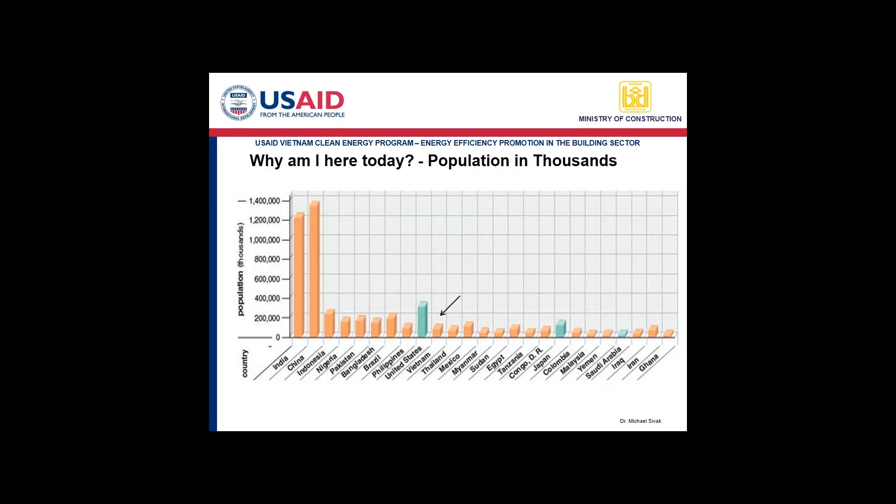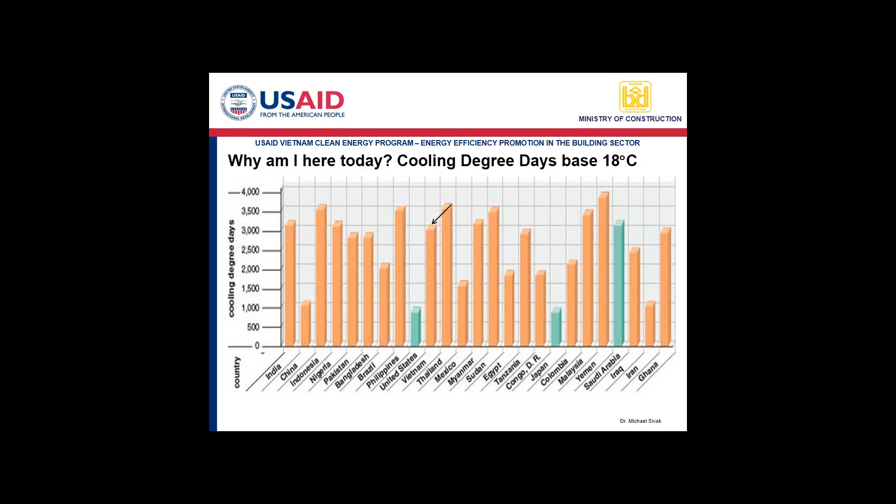So if you take the amount of energy used in air conditioning buildings in the United States, you take the population, and you take how hot it is, you can develop a metric called person cooling base United States.

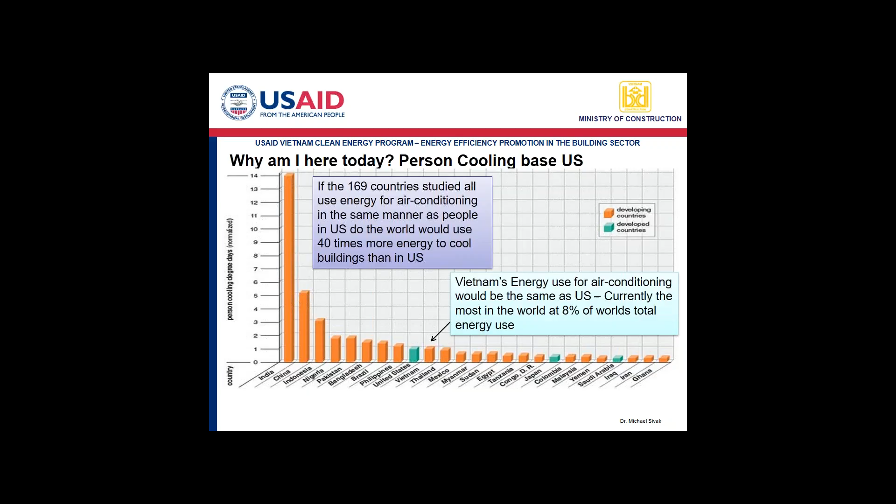I'm going to try to describe a method for using life cycle costs to decide the best systems to use in buildings.

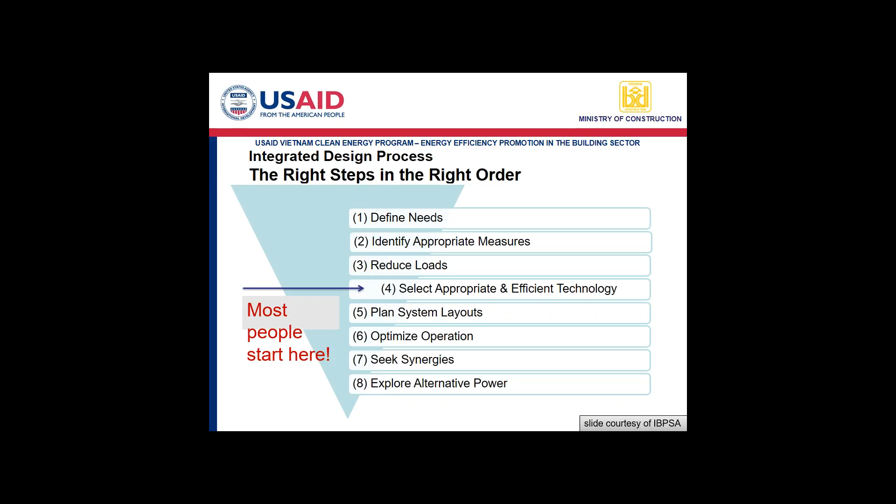What we should do is run a model at the first of the design and divide up the energy used in the building between the different people working on the design - the lighting designers, the architects, the engineers.

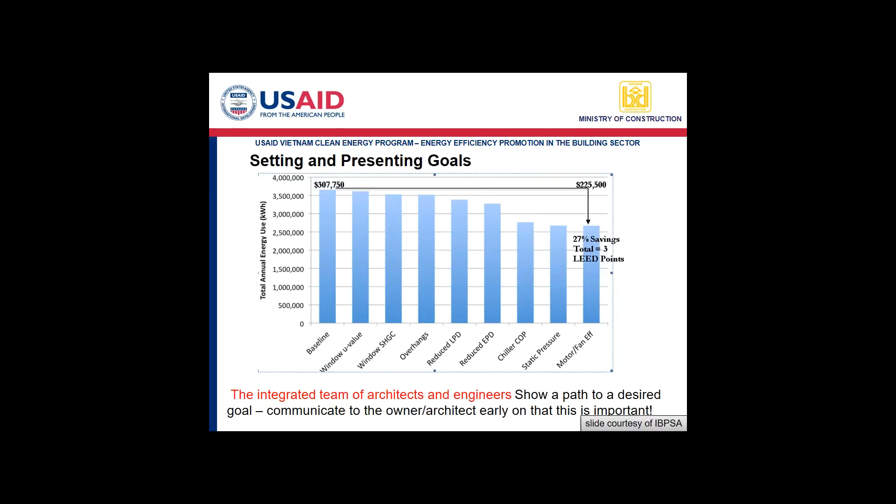One good way to do this is to have a goal setting charrette, which is a meeting where everyone involved in the project gets together and decides how best to solve the problems of energy use in the buildings.

Và sau đấy là cả nhóm họ tập hợp lại để thực hiện đặt ra cái mục tiêu. And everyone - the owner of the building, all the designers - agree on what type of goal we're going to set.

Whether normally it's a goal of kilowatt hours per square meter per year. Cái mục tiêu thông thường nhất sẽ là cái số kW giờ trên mét vuông một năm, cái mức tiêu thụ năng lượng tính theo diện tích.

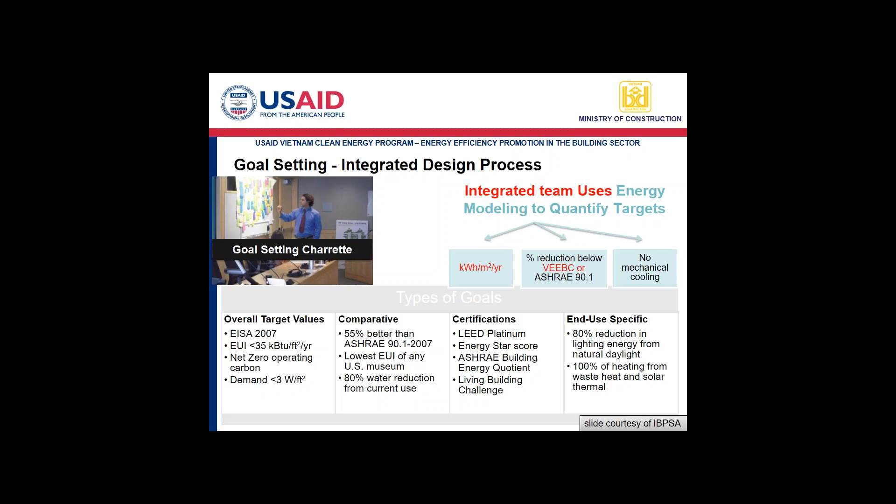And the technique I want to introduce is called technical potential of a measure. Và cái kỹ thuật, cái phương pháp thực hiện là cái kiểm tra cái tiềm năng kỹ thuật.

So it is the minimum level of energy consumption possible for a building given today's technology, excluding renewables. Thì đấy được gọi là định nghĩa, đây là cái mức năng lượng tiêu thụ thấp nhất có thể cho một công trình với những cái công nghệ mới nhất hiện nay, ngoại trừ cái năng lượng tái tạo.

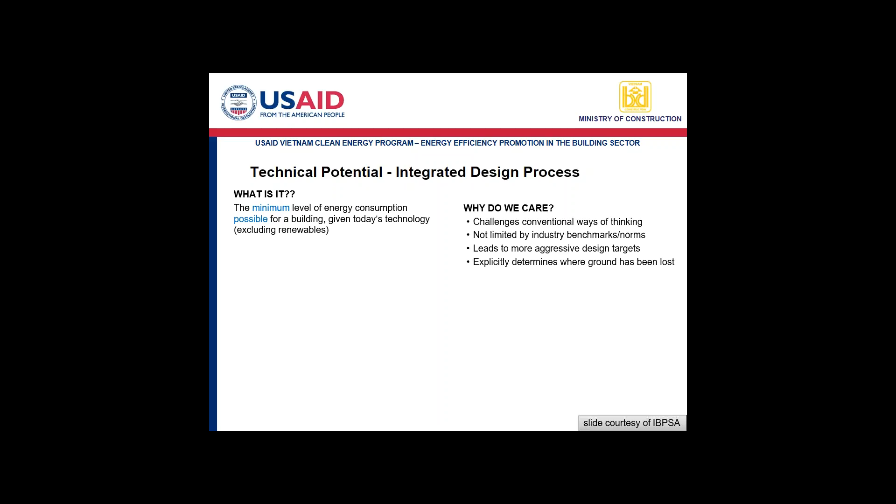It allows us to look at the building differently and to take the limits off, usually imposed by industry benchmarks and other preconceived notions. Và tại sao chúng ta phải thực hiện những cái này là do khi thay đổi thì chúng ta sẽ phải rất chú ý đến những cái yếu tố quy định tiêu chuẩn.

So this is a pump, for instance. You start with the current design of the pump, how much power it uses. And then you say, well, what if I used better control valves? What if I used larger pipe and lowered the pipe friction? What if I used long radius fittings and lowered the friction? What if I reduced the static head, if there is any static head on the pump? If I did all the things you could possibly do, you would get to a theoretical minimum energy use for the pump.

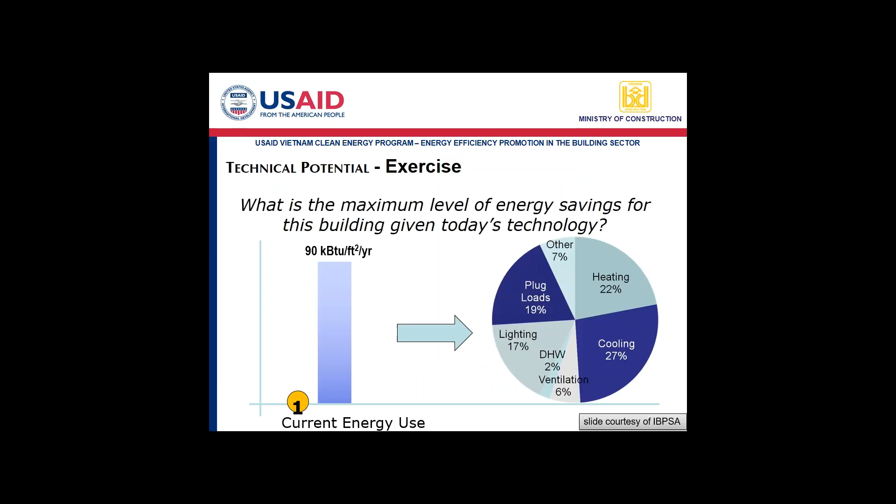Then you come back and say, I got 65% savings by doing everything possible.

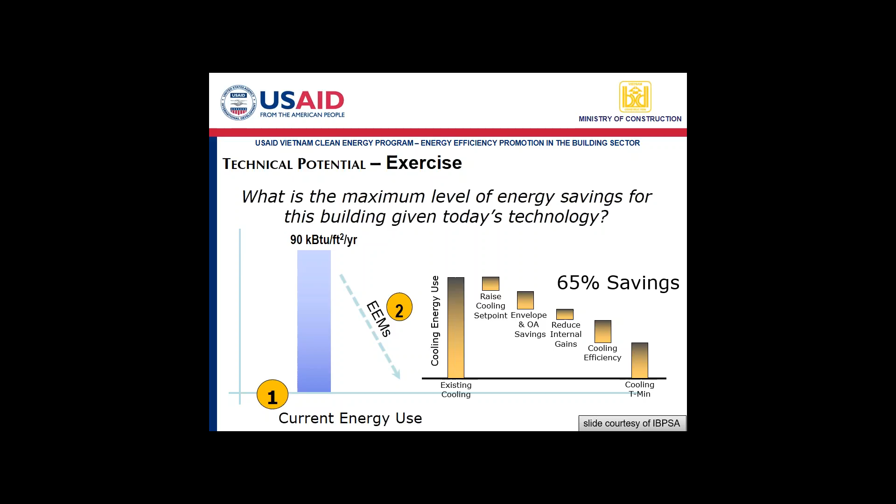But I can't really do everything that's possible. There are constraints, and the constraints you wait till the end to add them back in.

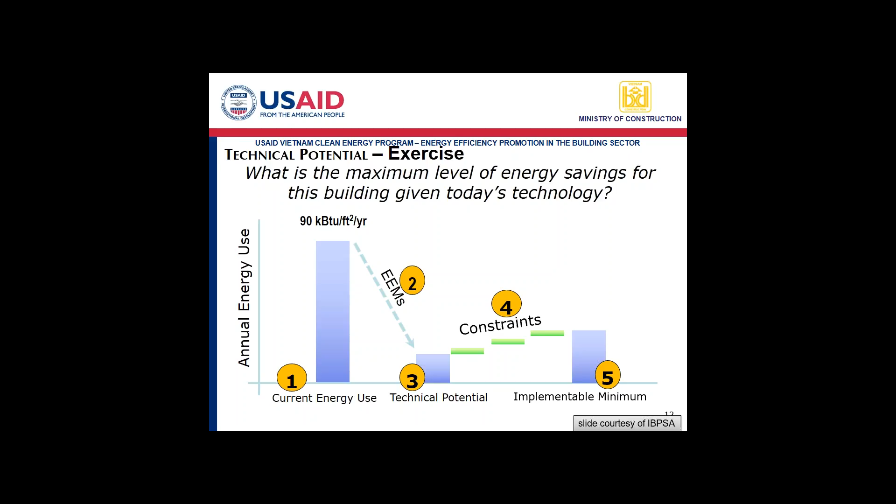So you have a potential of saving 67%, but 29% of that is not cost effective, and so you end up only saving, going from 30,000 BTUs per square foot up to 57.

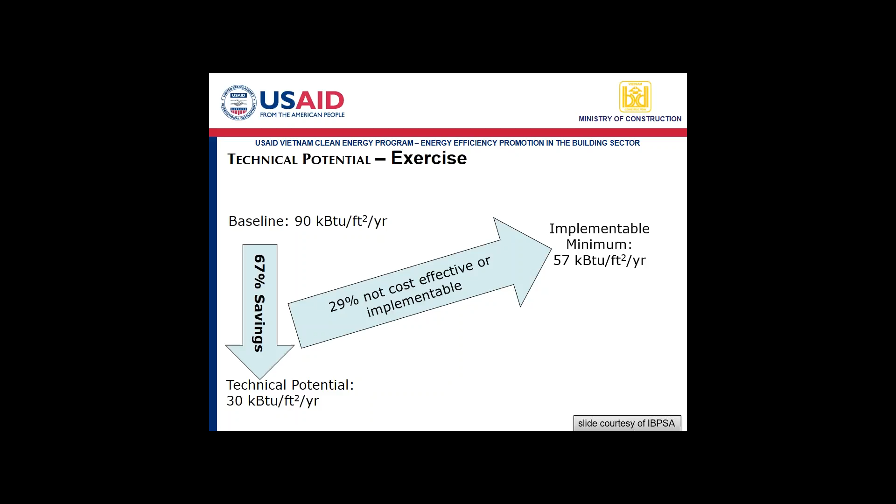Again, if we look at all of those things we can do to the building, we reduce those energy savings, but we still get a 38% reduction from what our technical minimum was.

So it's a method to not think about what it costs or whether you can do it until you get all the possibilities down, and then you start eliminating them instead of throwing them out at first.

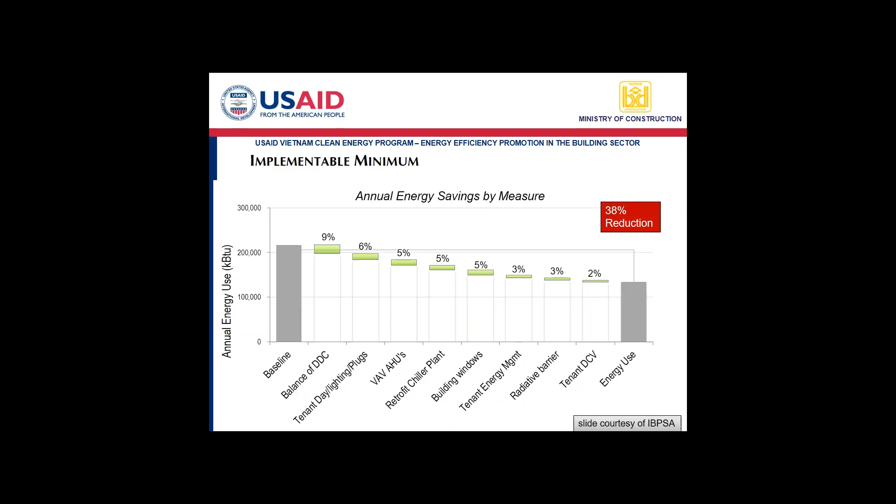Once you identify all your measures, you have to do a very good job of combining them into bundles and testing the influence they have on each other.

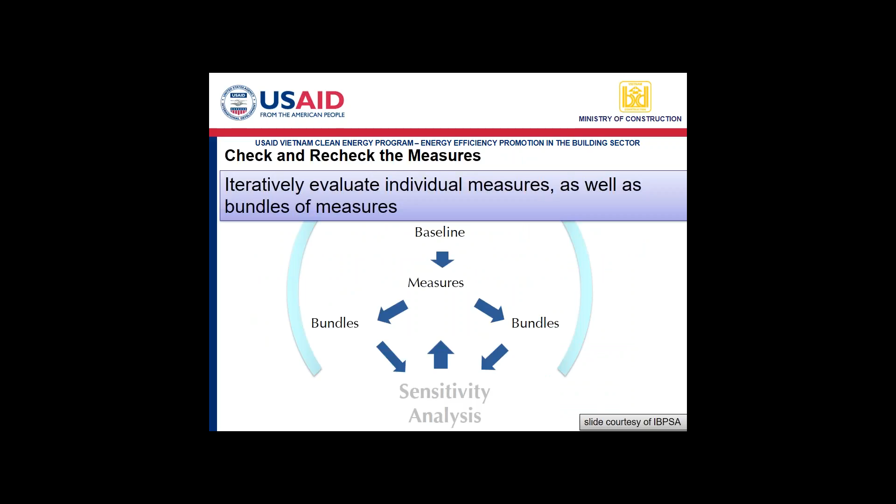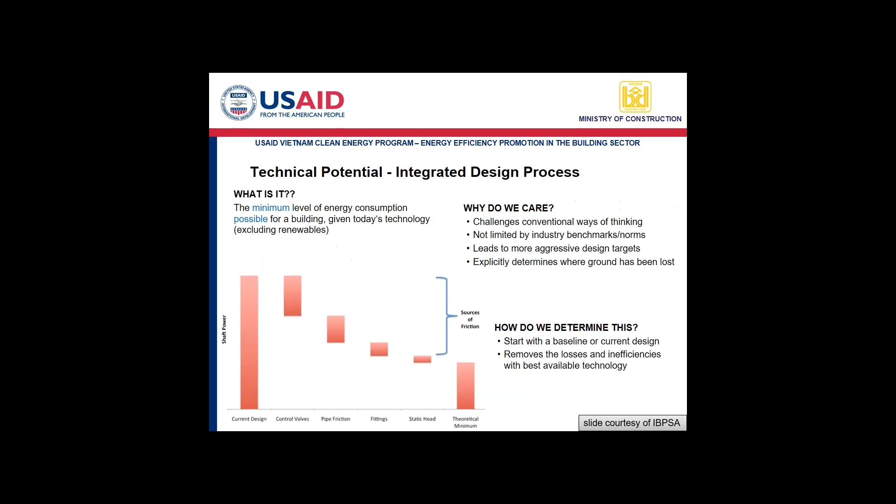So Joe is asking about the architect's influence on HVAC. The architect is responsible for the envelope. He has a large impact on the lighting. He has a large impact on the infiltration. So whatever the architect does to a building lasts for 35 years or longer, and it costs no more energy - it's first cost only. So the best thing you can do is spend a little extra money on the architecture, and mainly make him take all the windows out of the building and just put brick walls. Anyway, he is a big influence on the way we use energy.

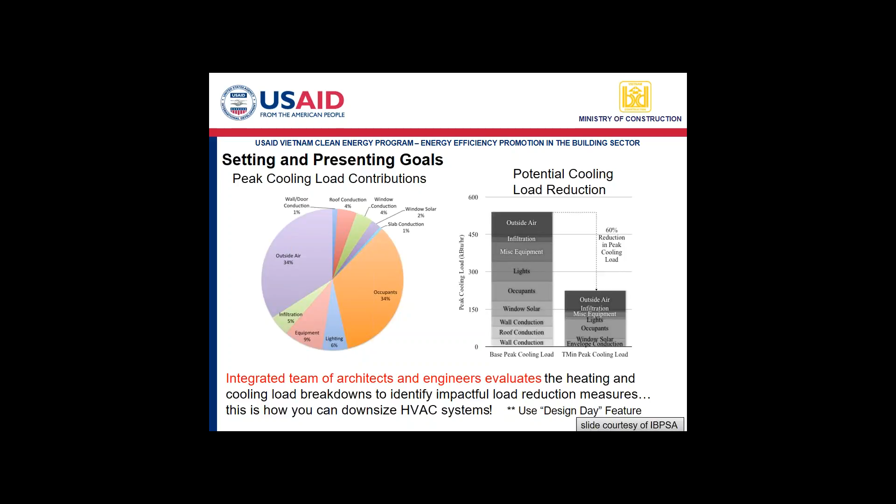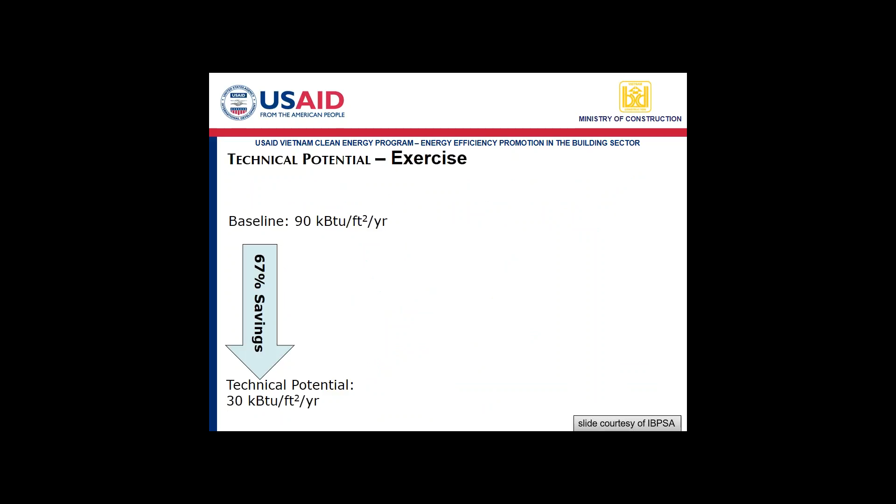Tức là ý của ông Joe muốn nhắc với ông Mike ở đây là đánh giá rất cao vai trò của kiến trúc sư ngay từ thiết kế ban đầu, phải giảm tải cho toàn bộ công trình, vì bất kể phương án thiết kế nào của chủ công trình thì ngay từ đầu nó sẽ ảnh hưởng đến công trình đó trong vòng 30 năm về sau. Do vậy thậm chí trước khi chúng ta nghiên cứu về vấn đề điều hòa không khí thì kiến trúc sư phải rất cẩn trọng trong vấn đề thiết kế vỏ bao che cũng như thẩm thấu của tòa nhà.

Most of my life, the lighting and the HVAC were both used about the same amount of energy in a building.

Khi mà ở những thời điểm đầu tiên thì tiêu thụ năng lượng cho ánh sáng và điều hòa không khí là khá tương đương nhau.

And now the lighting has gotten so good that the HVAC in general is the biggest energy user. Và bây giờ phần chiếu sáng đã giảm được rất tốt và phần tiêu thụ năng lượng lớn nhất thì thuộc về điều hòa.

Did you do these words yet? Okay.

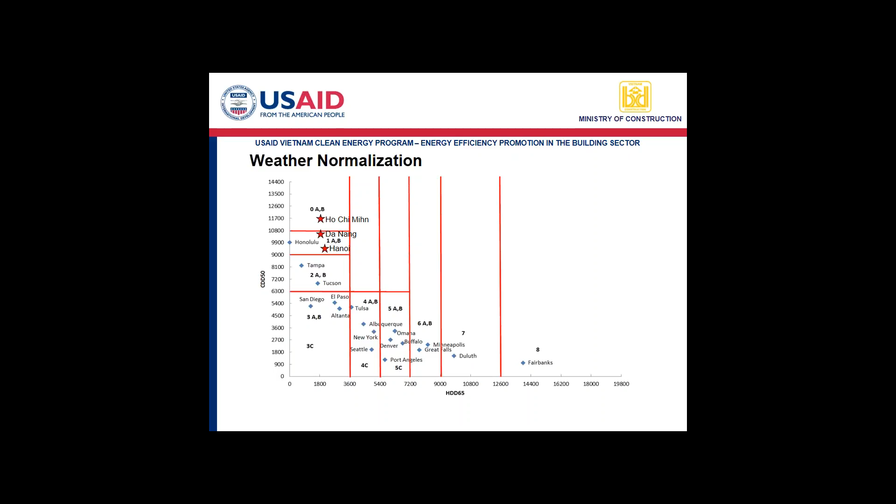So if we take the office building, the 4-story office building, and we run a model in each one of the cities that represent a different climate zone, including 5 cities in Vietnam, then we look at the cubic meters per hour of air per meter squared, and the cubic meters per hour per kW of cooling, and use those metrics to divide out the different cities.

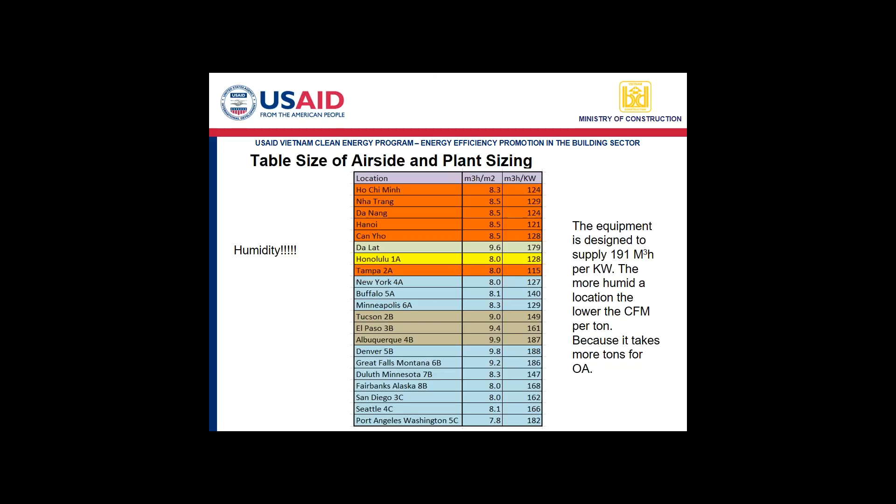You can see the hotter is in red. I'm running them from climate zones from the hottest to the coolest as we go down.

The amount of air we put in per square foot has more to do with altitude than anything else, because it takes more air to cool the higher you are above sea level. The density of air is less the higher you are on a mountain, so the fan has to push more air. You have to have more cubic... more air delivered to do the same amount of cooling.

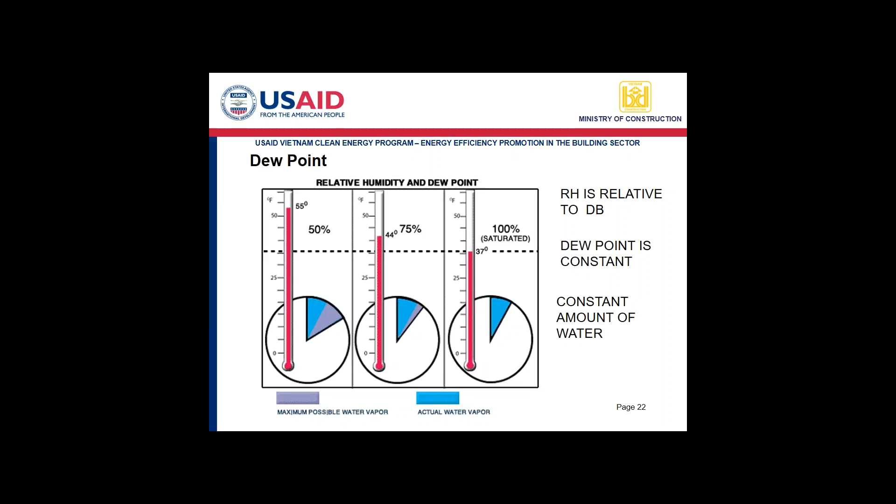So let's look at some HVAC systems. The first one we'll look at is for this office building, a 4-story office building, typical but well designed: a DX single zone split system.

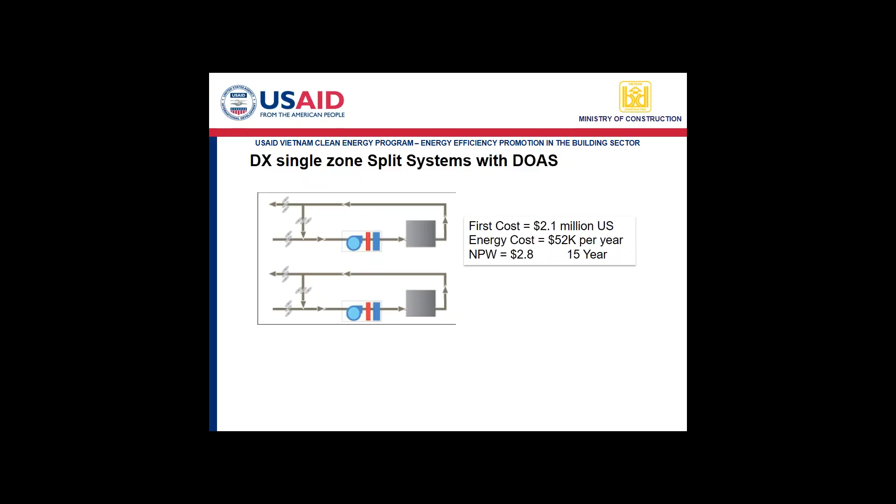So as we went through, the advantages of a split system are low first cost. It's easily maintained because it's a very simple system.

It can keep replacement parts, units, so you can just have some replacement units that you could put in quickly and anybody can work on it. And it minimizes the amount of square foot you use for HVAC systems in your building.

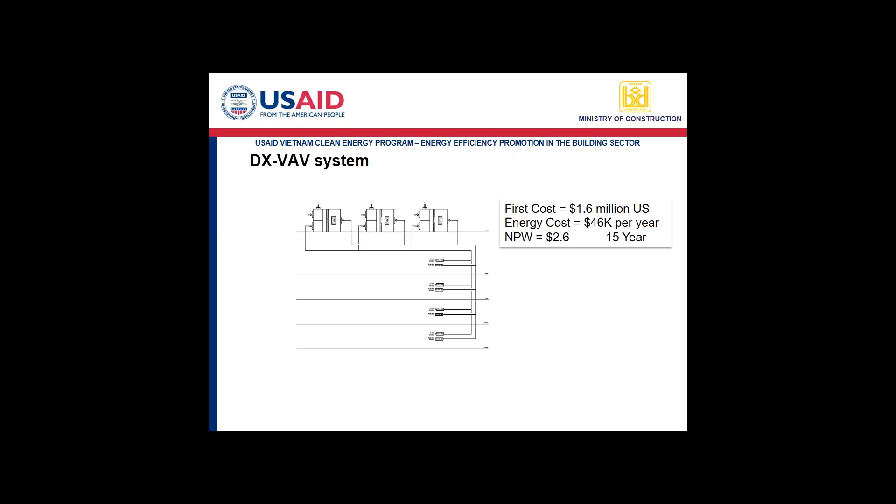So this has the lowest absolute first cost. It's the lowest life cycle cost with the demand-controlled ventilation. I'll explain that to you in a minute. And it's got the lowest maintenance cost.

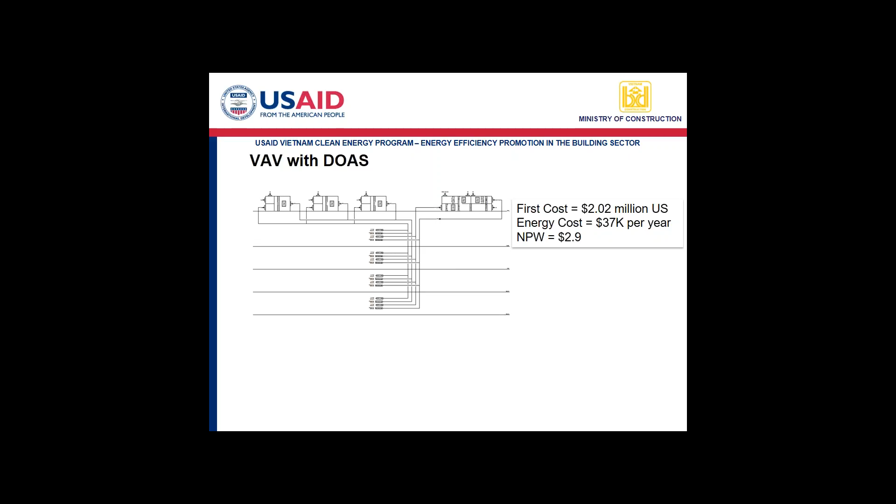So, if we add a dedicated outside air system to our VAV system, then we don't use that damper anymore. We only use the dedicated outside air system to supply the air, and we don't have that problem of the critical zone - meaning with a separate outside air processing unit, we avoid the inefficiency in outside air distribution. So when we add the dedicated outside air system, we get a more efficient distribution of outside air.

And we reduce the annual energy cost compared to other systems - this reduces energy consumption compared to other systems. But it costs more, and to do it, you have to run duct work twice: sheet metal ducts to the room two times, once for supply air, once for outside air - meaning we need two separate duct runs, one for cold air supply and one for fresh air supply, doubling the ductwork system.

Next, we looked at variable refrigerant flow (VRF/VRV), a central air conditioning system using refrigerant gas with variable flow. It looks like split systems, like DX split air conditioning, except the outdoor condenser unit serves many indoor units, so one condenser serves several evaporators. The operating principle is similar to local air conditioning systems, using heat exchange coils with refrigerant gas as the cooling medium, similar to variable air volume systems.

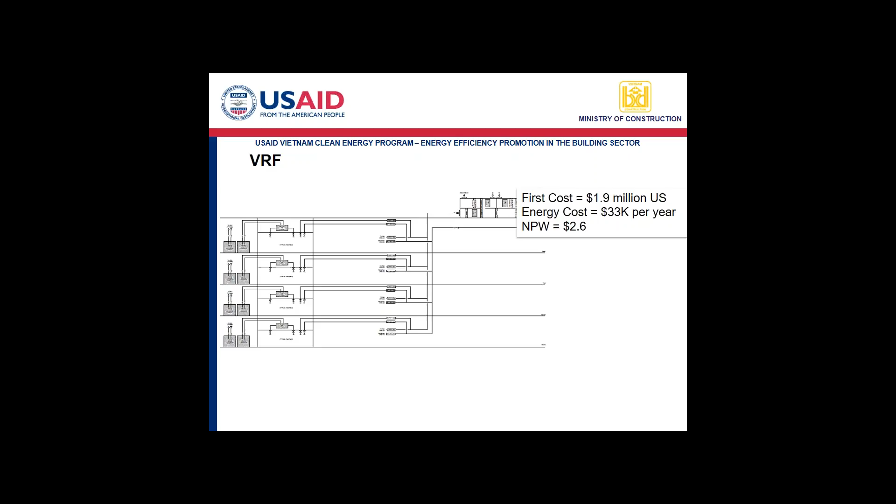The reason it doesn't have a higher net present value is that, at least in America where this study was run, they believe maintenance costs will be higher because engineers there are not as familiar with this system as people in Vietnam and Japan, where it's more commonly used.

The problem with variable refrigerant flow in Vietnam is it cannot remove enough moisture to dehumidify the space if you bring in outside air - it's impossible for it to remove that much moisture from the air.

So you have a choice: either don't bring in outside air, making the room feel stuffy and not meeting building code, or close off the fresh air valve to maintain humidity and temperature control, or add a dedicated outside air system if you want to meet building code requirements.

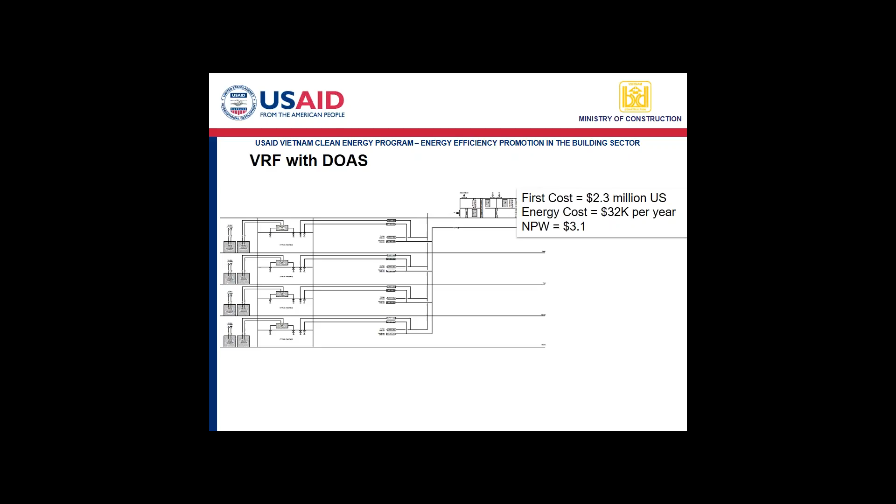So the pros and cons: it's more efficient distribution of outside air with dedicated outside air, simultaneous heating and cooling without electric reheat, more direct response to space heating and cooling requirements because each room has its own unit, reduced annual energy cost, and about the same life cycle cost.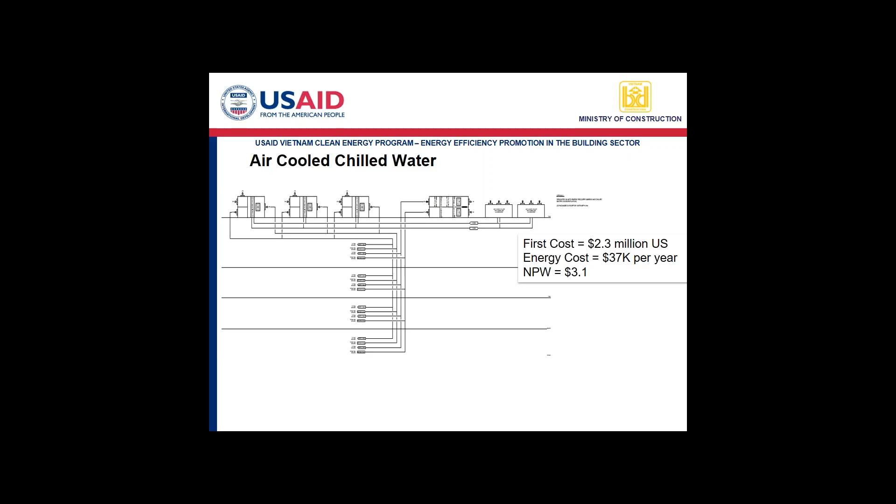The higher the number, the better.

Which is not intuitive.

More efficient distribution again when we've added DOAS to it. More direct response to the heating and cooling requirements. The first cost, due to the chiller and chill water piping, is quite high, but it is competitive. We compete. VRF and chill water both cost the same amount per kW, or very close to the same amount.

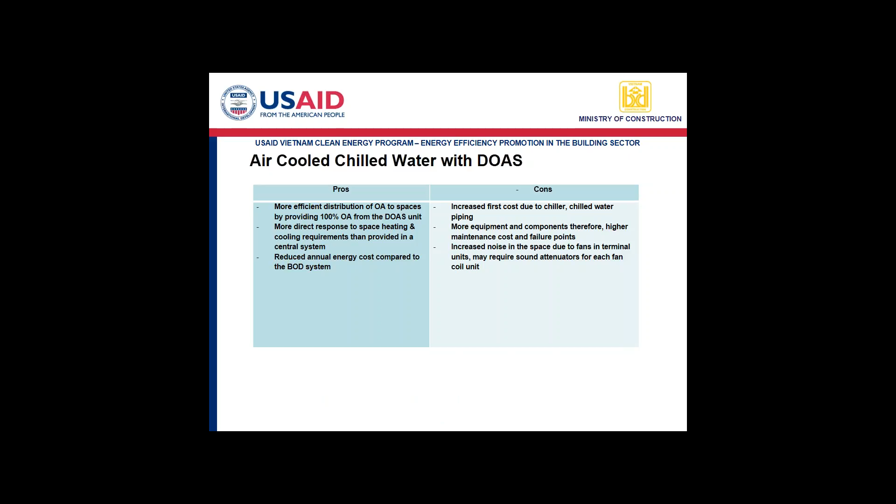All right, so if we do it on a single chart so you can look at it more easily: system type, DX split, DX VAV, VRF, chill water fan coil units.

Energy use with dedicated outside air.

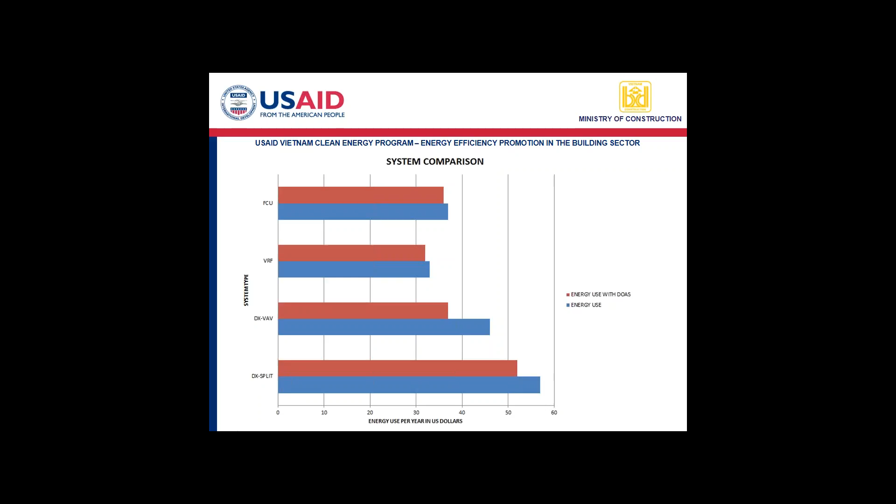But if we look at the humidity, which I was talking about, this is the split system DX without dedicated outside air. This is the percent relative humidity.

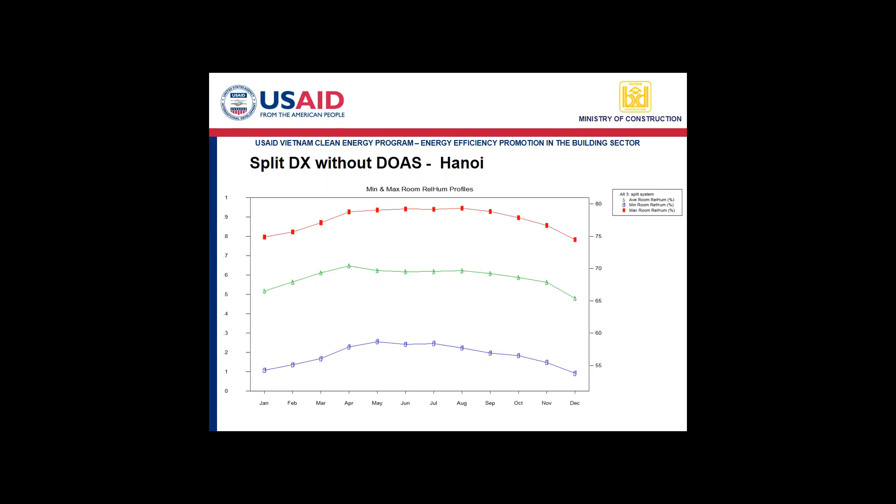So if we add the DOAS, the dedicated outside air system, to the split systems, you can see we bring it at worst right at 70 constantly.

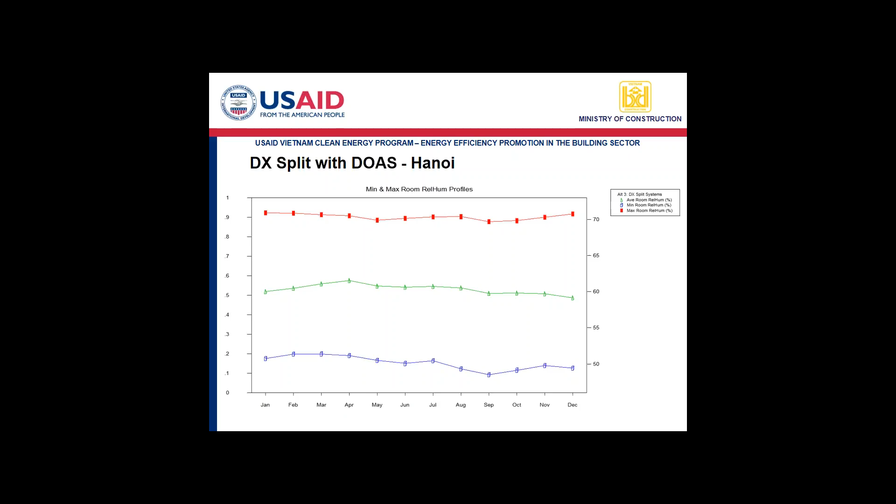So just to make it clear what a split system is, this is the outside air unit, the condenser. This would be hung on the wall or sitting on the ground or on the roof. This is the inside unit, the air handling unit.

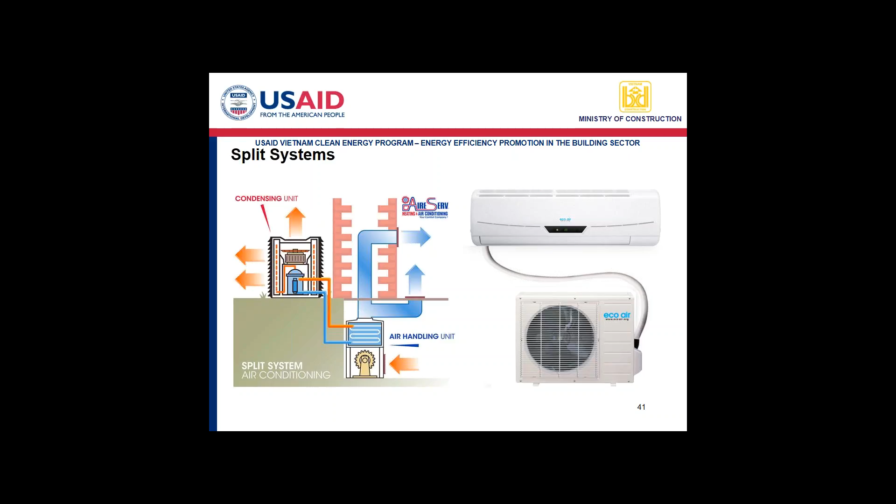It's 3 o'clock. You want to break? We keep going - for what time are we supposed to stop for the first break? First break.

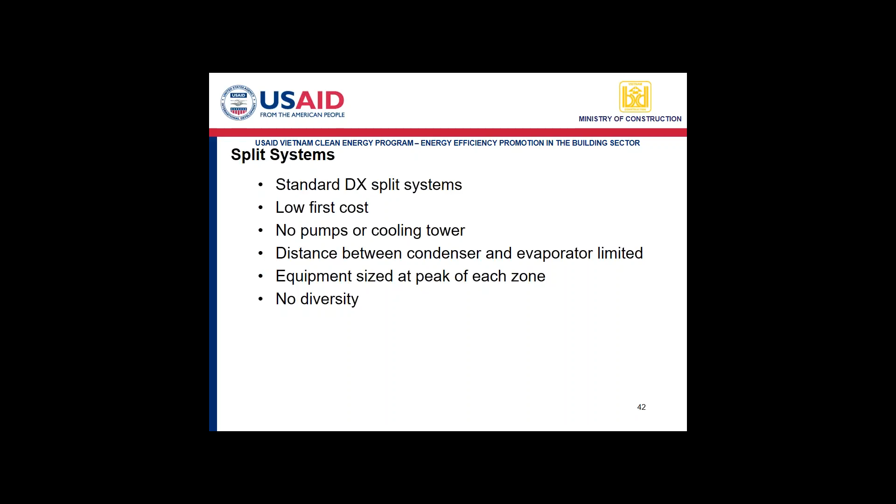The direct expansion DX system that we used for the variable air volume has everything we just looked at in one big package.

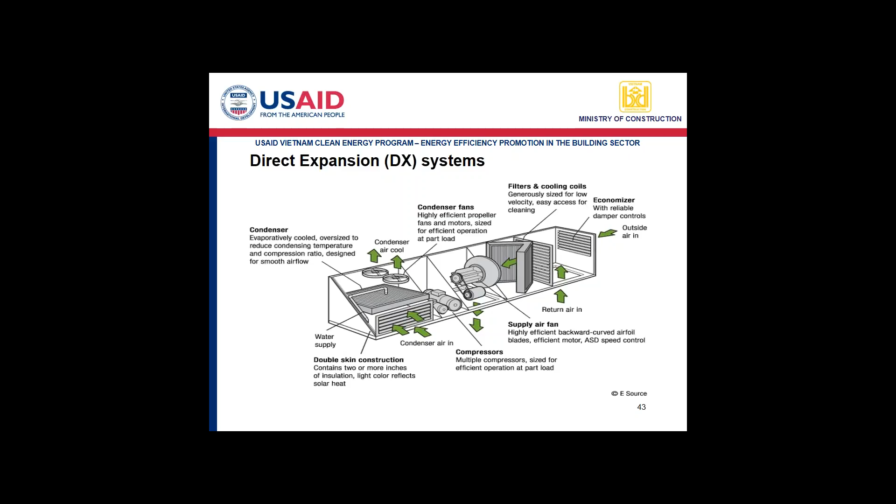The VRF system has the same outdoor air unit, it's just a little bit bigger. And then it comes into some sort of control box, a branch controller, and splits out to serve many different evaporators in many different spaces.

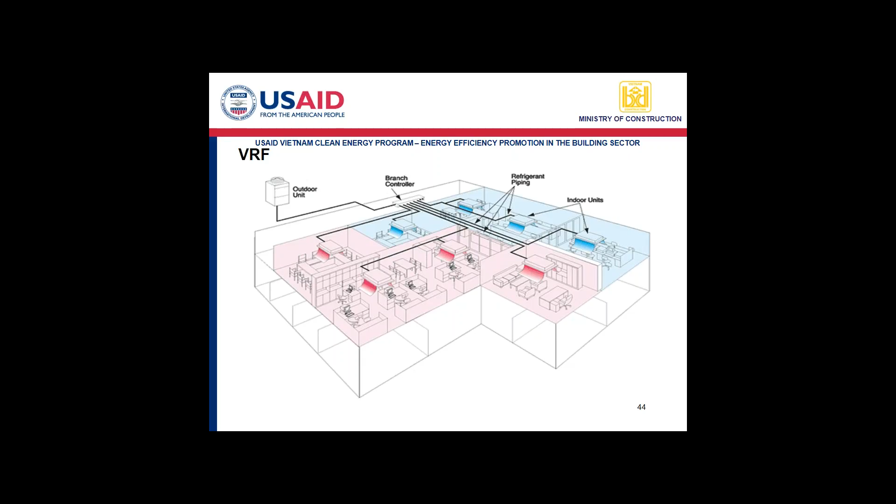You may have problems with outside air if you do not use a dedicated outside air system.

You still have one unit in each zone, but multiple units per compressor. This allows diversity like a variable air volume system, with no pumps or cooling tower, and it has a much better load match than a DX system because of that diversity.

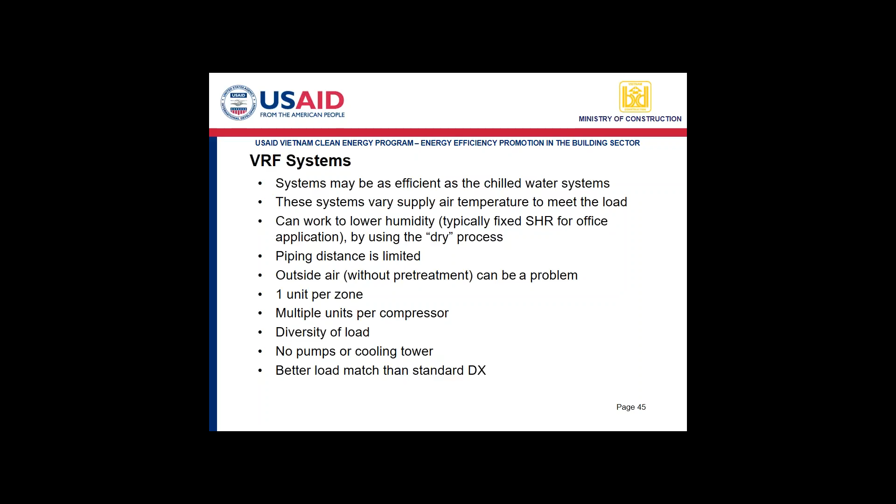So when you size a variable refrigerant flow system, this is one of the advantages you have.

Let's talk about block load. A block load is, at any one time, the total load for the building. If we had 4 rooms in a building at 9 a.m., the block load would be 34,500 — just add up the zones.

At 12 p.m., the block load is 55,000, and at 3 p.m. it's 45,500. Those are block loads.

So the outside unit, the condenser on a variable refrigerant flow system, you pick the largest block load — in this case noon — and size that unit at 55,000 BTUs.

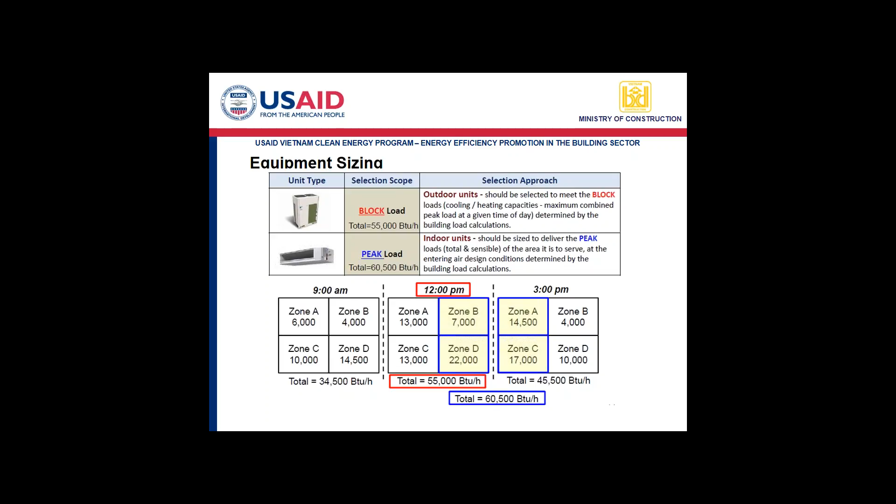One of the things about variable refrigerant flow is each manufacturer has some special parts you have to use. This manufacturer has a special Y copper fitting that splits the refrigerant flow to each unit. Obviously, when you're buying, you have to buy extra parts from each manufacturer, and generally they're more expensive. They charge you more than they're probably worth because you have to buy them.

These branch Ys, the manufacturer that sold you the equipment also sells you this special fitting he makes you use. Obviously this is an expensive piece of copper that you have to buy. So the system gets more expensive even though you're buying less compressor.

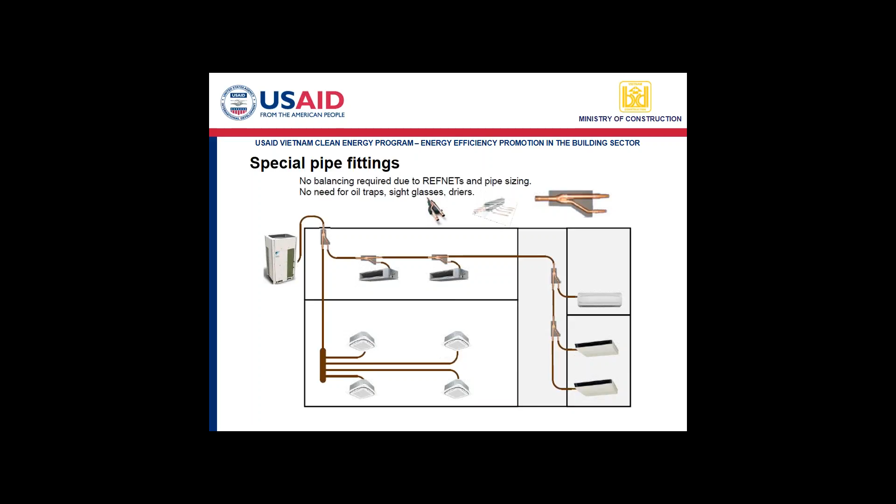You probably need to let the manufacturer do your piping for you. Even if you're the best engineer in the world, because of liability and guarantee of it working, you probably need to let the manufacturer you decide to use lay out the piping to make sure you have a good VRF system.

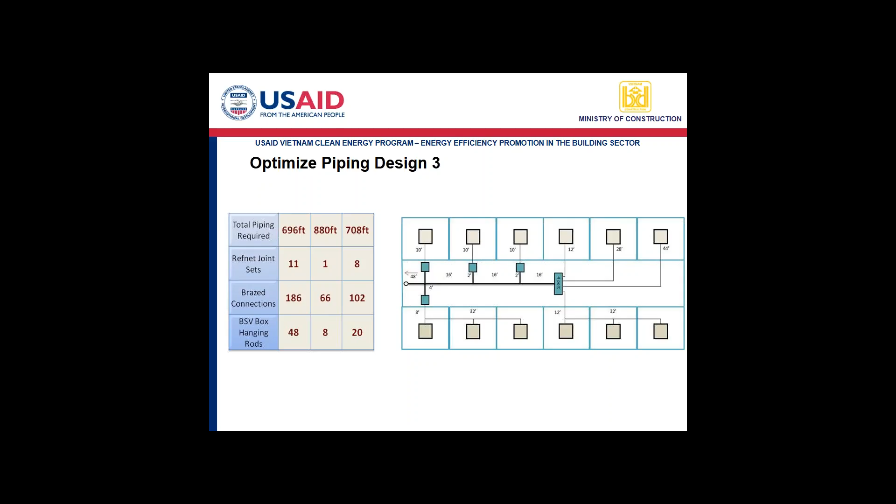So now if we look at chillers, again, these chillers only work well in bigger systems.

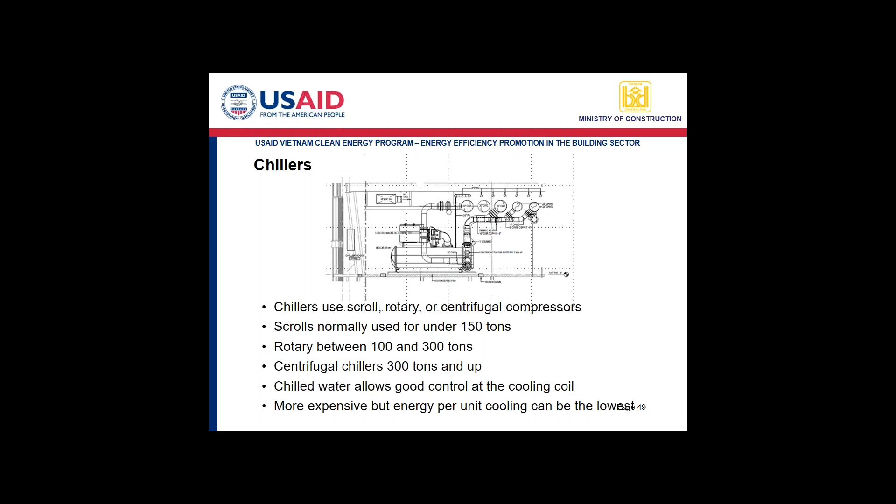So it's more efficient, and it costs more, and probably gives you the most comfort in the space. Do đó thì là cái hệ thống sử dụng nước lạnh thì sẽ đảm bảo cái độ tiện nghi hơn.

So the water-cooled chiller, again, this is with the cooling tower, are normally offered the lowest energy per unit of cooling. Chiller giải nhiệt nước, máy cấp lạnh, làm lạnh nước, giải nhiệt bằng nước ấy, thì thông thường là đưa ra một cái năng lượng tiêu thụ trên một đơn vị lạnh là thấp nhất.

The units you place in the building can vary from a big unit in a room of its own or a little unit hung above the ceiling. Very many choices. Và chúng rất là linh hoạt, có thể phục vụ được rất nhiều loại cái thiết bị làm lạnh khác nhau. With chill water, water-cooled chill water, you have many energy recovery and economizer opportunities in your plant, in your chill water plant.

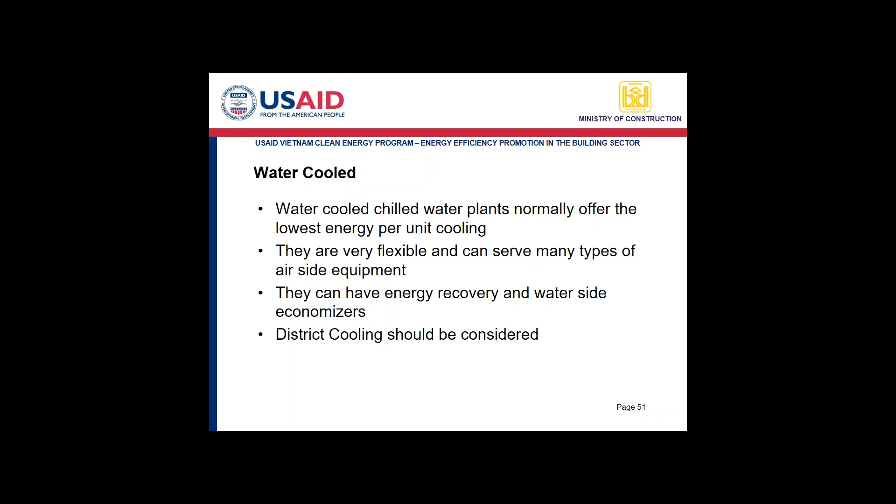In many places, like in Houston, this plant serves many buildings. So it's called district cooling, and it cools the hospital district from one single location. Lots of pipes run underground. Ở đây thì ở Mỹ thì các máy này được lắp đặt ở các trạm lạnh lớn, phục vụ cho cả một khu vực rộng. Ví dụ như ở đây là phục vụ cho cái quận y tế ở thành phố Houston.

This allows the quality people that maintain the equipment to work in one area instead of many different buildings. So you can hire really good staff if you've got a great big plant, and each building doesn't have to hire its own staff. Do đó thì cái nhân lực bảo trì ở đây sẽ thật thấp hơn, do là chỉ có phục vụ cho một khu vực duy nhất thôi, không cần từng tòa nhà phải có một cái lực lượng vận hành bảo trì riêng biệt.

Anyway, air-cooled chillers. So now those were cooling towers. Air-cooled chillers are quite a bit cheaper. Here's a picture of an air-cooled chiller. We saw some the other day at a hospital, a clinic. Air-cooled eliminates the need for the cooling tower and the condenser pumps.

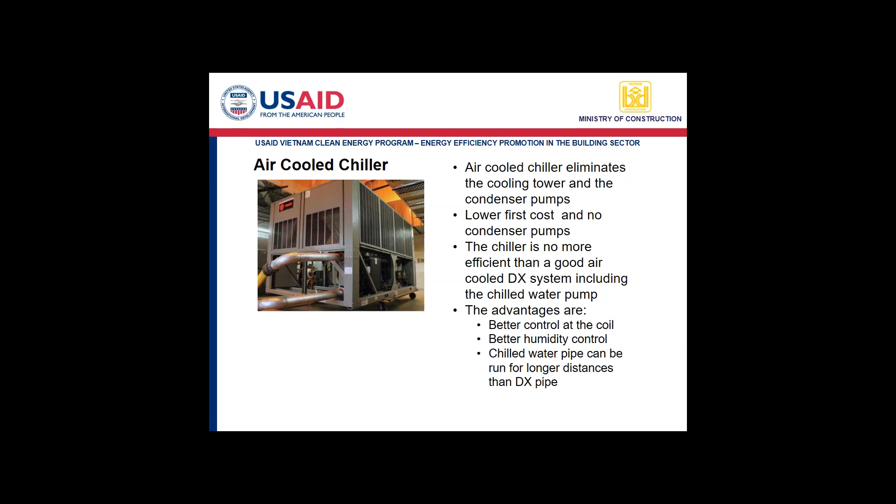A chill water valve is better control than a compressor turning on and off, giving better load control at larger cooling capacities and better humidity control. A chill water pipe can run as far as you want with no distance requirements, unlike refrigerant systems which are affected by pipe length.

I made a table for the ranges of efficiencies of different equipment, whether air-cooled chiller, DX chiller, or VRF, giving some idea of efficiencies to compare. There are minimum efficiency and minimum COP requirements for each compressor type and cooling method.

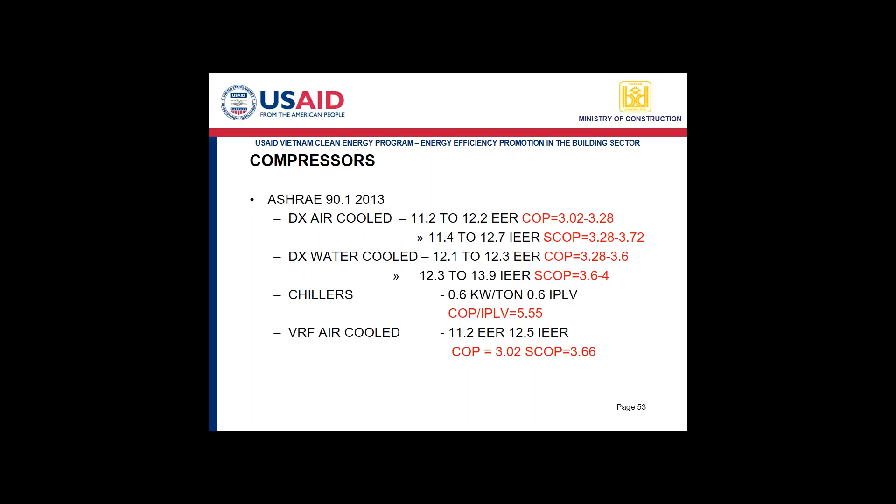Cooling towers have the advantage of lowering temperature to the wet bulb temperature versus the dry bulb temperature - you reject heat to the wet bulb, which is always lower than dry bulb. Wet cooling towers reject heat based on the wet bulb temperature of air, which is usually lower than the dry bulb temperature. But they use pump energy, cost water, and cost chemical treatment.

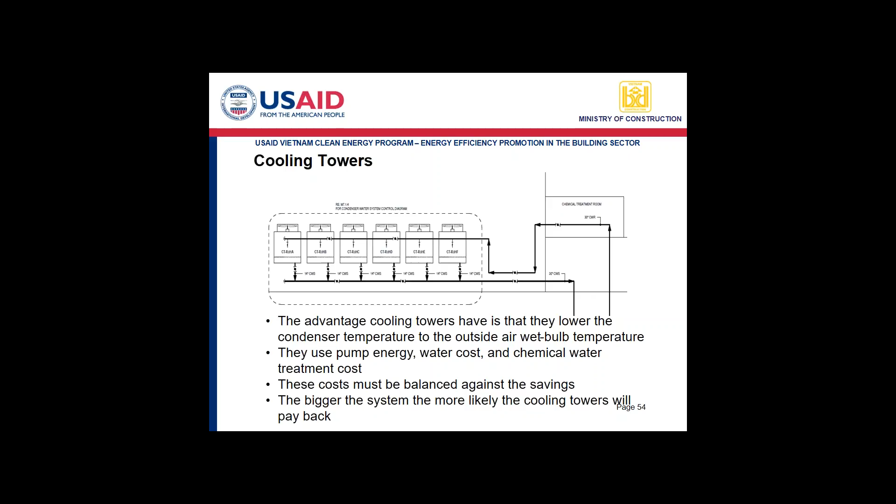Multi-zone VAV system is currently the most popular system in the U.S. and most of Europe. One reason it's so popular is you can put a thermostat for each VAV box, so everybody can have their own temperature control for each zone.

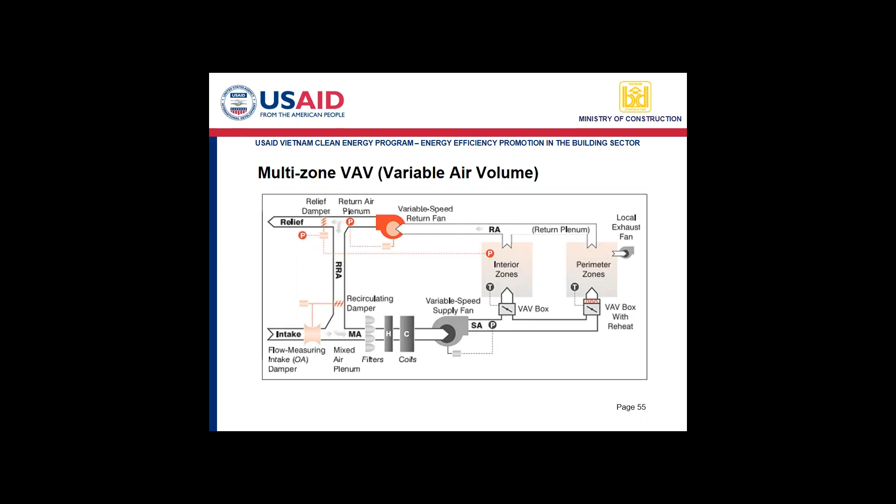The heating is done at the VAV box, where air is reheated at each box. It uses constant temperature air but varies the amount of air delivered, which saves energy.

Nó cấp không khí lạnh đến tất cả các vùng làm việc, một nhiệt độ không khí với nhiệt độ không đổi, tuy nhiên là thay đổi với lưu lượng cho từng vùng là khác nhau. For a big building, it's very inexpensive per square foot of building size. Very cheap. Ở đây là cái hệ thống có chi phí ban đầu đầu tư thấp nhất đối với các tòa nhà lớn.

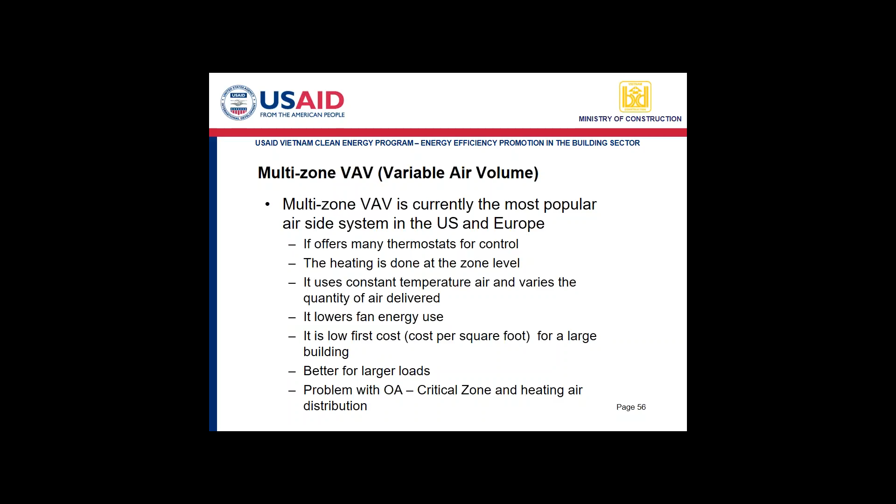It's larger loads, so you can use it for diversity - that's best. Nó tốt cho các tải lớn do là có cái hệ số đồng thời, có thể sử dụng hệ số đồng thời. But you do have that problem with outside air in the critical zone. Nhưng mà có cái vấn đề với cấp khí tươi cho các khu vực sử dụng có cái tải người lớn.

Fan coil units in each space are another option, and this again, you have a lot of pipe, a lot of insulation, a lot of maintenance above the ceiling, but it is another option for chilled water use. Cục bộ chạy nước lạnh là một cái giải pháp khác. Tuy nhiên chúng ta có rất nhiều quạt, rất nhiều dàn lạnh trong từng khu vực, mỗi khu vực sử dụng.

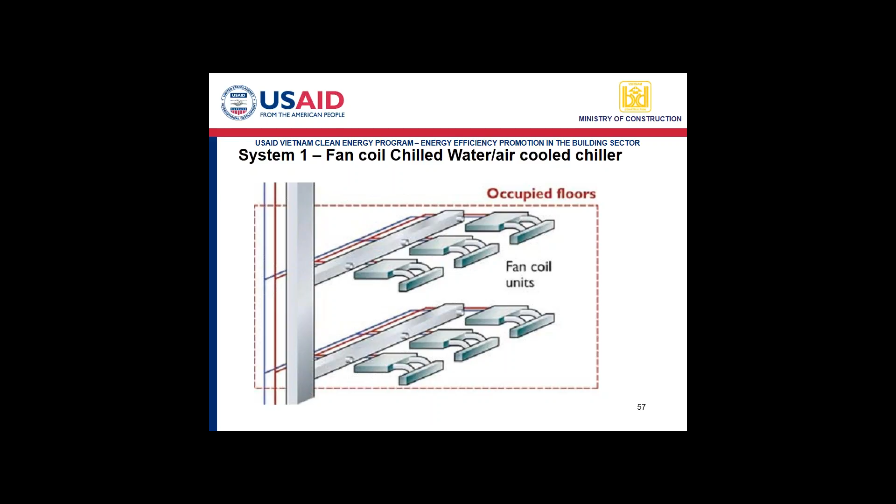Now we're going to talk about the dedicated outside air systems a minute. You must use one of these with your variable refrigerant system here in Vietnam. Các hệ thống sử dụng bộ cấp khí tươi riêng biệt thì phải sử dụng với một cái hệ thống dàn lạnh cục bộ, chạy nước lạnh hoặc chạy ga.

You should supply cool dry air directly to the spaces. You should remove the outside air load from these small VRF systems, and the air supplied to the space should be at a lower dew point than the space you're supplying it to. Hệ thống này sẽ cấp không khí lạnh và khô vào trong không gian sử dụng và loại bỏ cái tải lạnh của không khí ngoài trời khỏi...

...khỏi các thiết bị lạnh cục bộ như FCU hay là VRF. Và cái hệ thống này yêu cầu là khi cấp khí tươi vào trong cái vùng làm việc thì phải có cái nhiệt độ điểm sương thấp hơn cái nhiệt độ điểm sương của phòng.

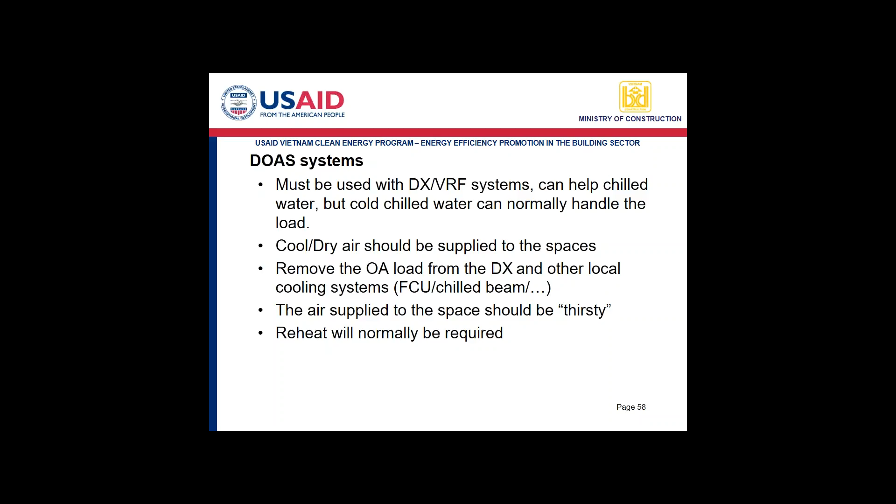Một trong những cái cấu kiện quan trọng nhất của cái máy này là cái thiết bị bánh xe thổi nhiệt để giúp cho cái việc khử ẩm không khí ban đầu nó hiệu quả hơn, tốn ít năng lượng hơn.

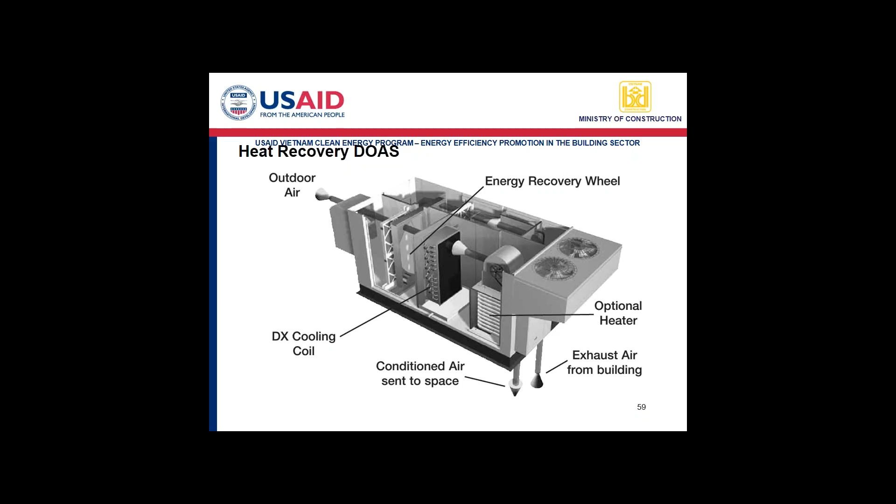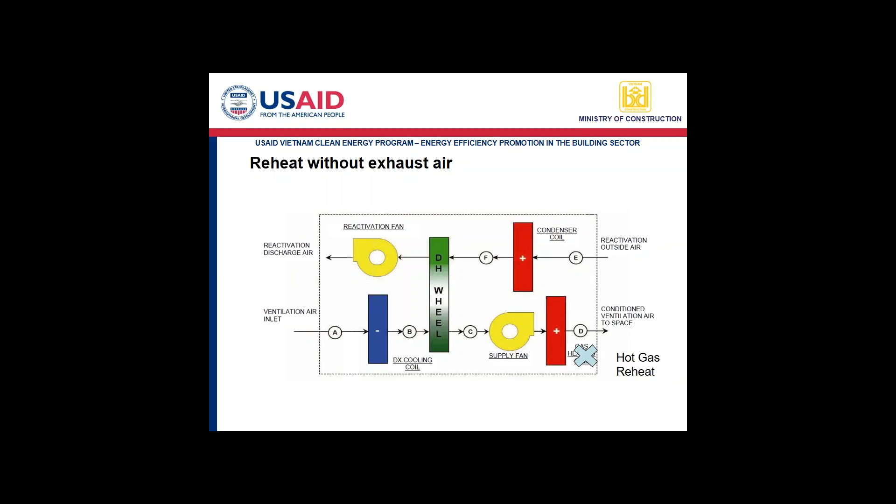So we supply this air directly to the room, not through the air conditioning systems. What most people do is they say it's room neutral air, the same temperature and humidity as the room. I try to get people to use it with lower humidity than the room, so the dew point will be lower, and it will take up some of the moisture generated by a room full of people.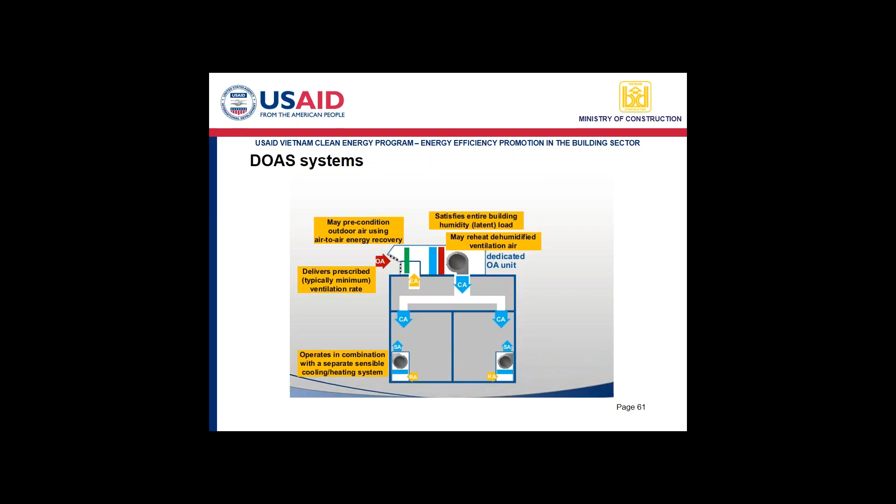Đối với các hệ thống DOAS thì cấp không khí này trực tiếp vào cái không gian sử dụng, và thông thường thì người ta hay sử dụng làm lạnh không khí đến điều kiện nhiệt độ và độ ẩm của phòng. Nhưng mà tôi thì tự khuyến nghị là nên cấp không khí làm lạnh không khí ngoài trời khô hơn nhiệt độ phòng để có thể đảm bảo được cái tải ẩn của người ở trong phòng. This is another schematic of a dedicated outside air system.

We only have a few minutes, so we're not going to go through this one. But you can see that the units can get fairly complicated. This is a real life job that Colin worked on.

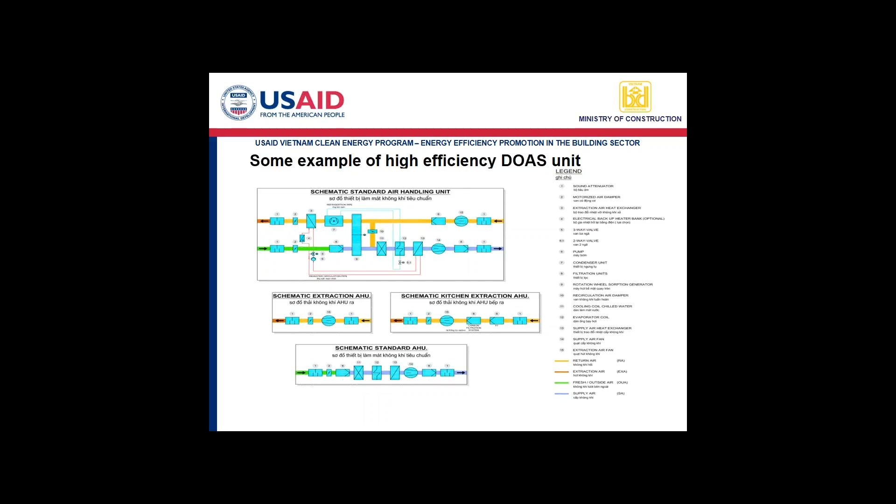And again, this is another picture of the same type of unit, just a little bit different view.

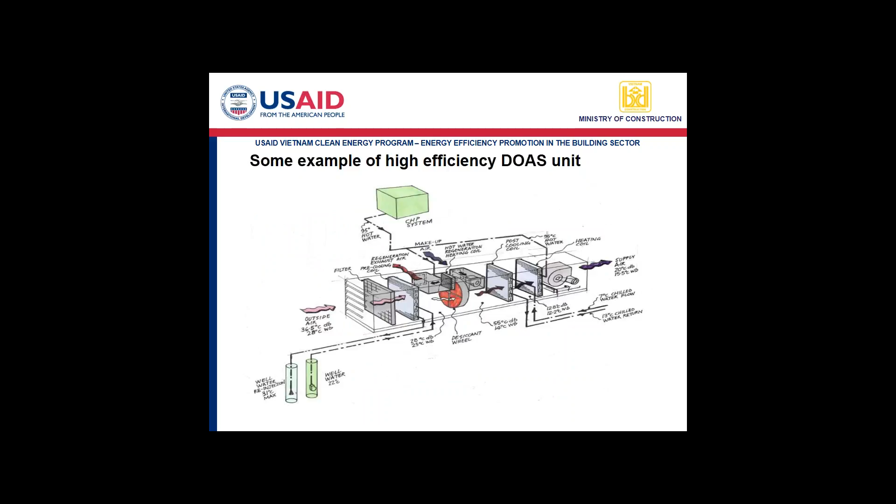And this is a psychrometric chart. Now, normally I would force you to sit here at the very end and spend 15 minutes with me going through the psychrometric chart. I think it's very important for engineers to use psychrometrics, especially when designing dehumidification or working with humidity, because this chart tells how air and water mix and operate, and it's an easy way to graphically make sure you're not making a mistake and you're doing the correct thing.

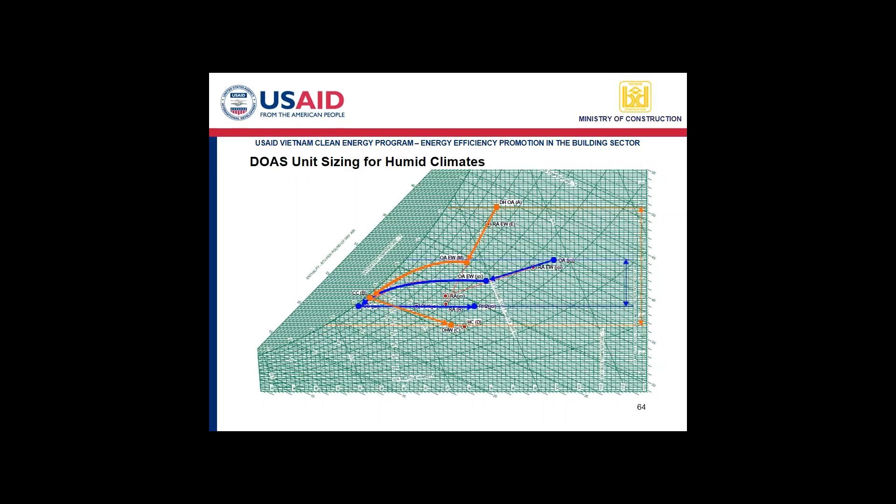Thank you. So while the architects are answering...